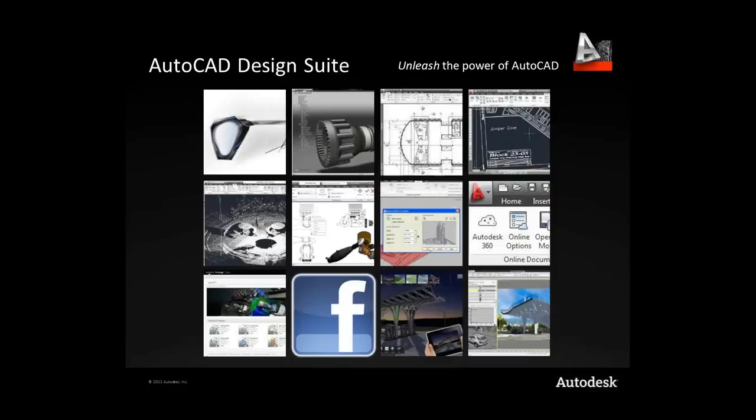And you may be asking yourself how it's able to do that. AutoCAD Design Suite enables you to do more with your AutoCAD software. Because the tools are within AutoCAD and leverage the power of AutoCAD, it enhances what you already know and takes everything up to the next level.

As I stated before, the AutoCAD Design Suite really is the best way for you to get AutoCAD, because it gives you the power of AutoCAD to capture, create, connect, and even showcase your designs.

There are three versions of the AutoCAD Design Suite: Standard, Premium, and Ultimate. Each edition is enhanced with products to help you increase your design capabilities, all based around the heart of the suite, and as it sounds, the heart is AutoCAD.

If you look at what you might want to leverage with the Standard Edition, the Standard Edition is the core product of the suite, and it's made up of AutoCAD, AutoCAD Raster Design, Sketchbook Designer, Showcase, and Mudbox.

The Premium Edition comes with all the tools I just mentioned in Standard, but also adds a level of design visualization, which enables you to add Autodesk 3ds Max design to the workflow. The Ultimate Edition adds everything Standard and Premium have, but also adds surfacing capabilities with Alias Design. But at the heart of the AutoCAD Design Suite is AutoCAD, and it enables you to take your AutoCAD up to the next level.

Without any further delay, I'd like to turn the floor over to Lynn. Lynn, can you get us up to speed today?

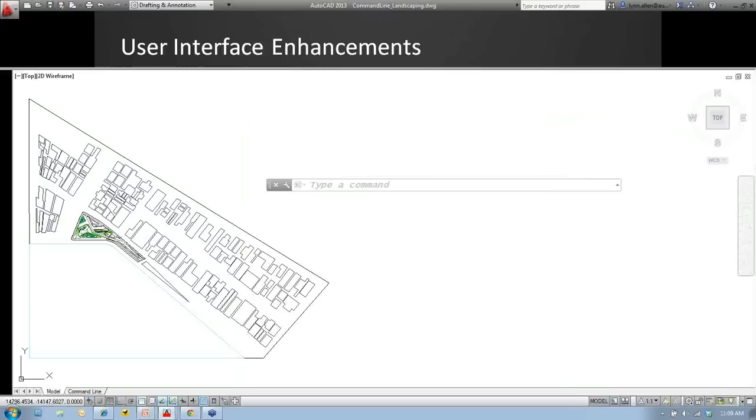Let's jump over and take a look at some of the changes to the user interface inside of AutoCAD 2013. I'm sure Christy will jump on the line if for some reason you can't do things correctly or if I'm going too fast. Right, Christy? You're good, okay, all right.

Here we are inside of AutoCAD 2013. One of the first things you'll notice after you log on is that the command line is a little different than it has been in the past. I am a command line user, and I'm sure you probably are too, so I don't like changes made to the command line—it makes me nervous, but you're going to really like these changes. I've been quite happy, so let me show you.

If you look at the command line, you can see it's in this semi-transparent state. Notice as I move my cursor over it, it shows up. So those of you who are greedy with your screen real estate—and you know who you are—think about this: you can take the command line, move it into a corner of the screen, and make it even more transparent than it already is, so it's completely out of your way, giving you a little more drawing room. Now I have it right in the middle of the screen. You're never going to do that, but I just want to make it easy for you to see how this new updated command line works.

So I'm going to just go into the polyline command. You can see I still key everything in, right? Don't be like me, be better than me.

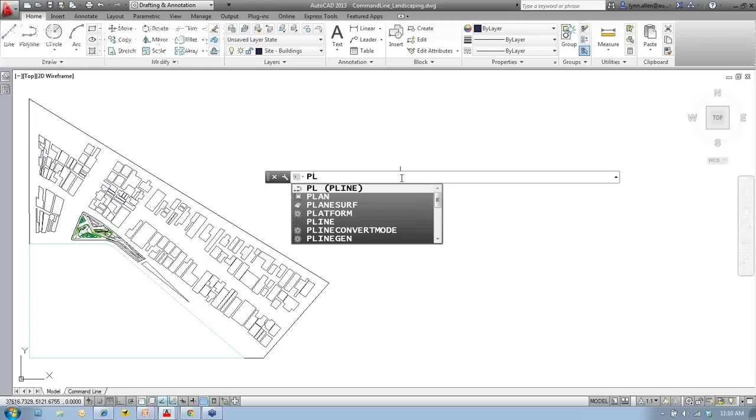And I'm going to do a polyline. I'm just going to start to draw, and you'll see the history shows up above the command line. I love this next new feature. Notice how the options in the polyline command are highlighted in blue. Look, I can actually grab them with my mouse from the command line. Love, love, love that. That means I don't have to pick up my hand and move my fingers.

So did you see the history? Did you see it kind of vanished away into the abyss? So when you're done with it, you don't need it anymore. It's kind enough to go away, which I love.

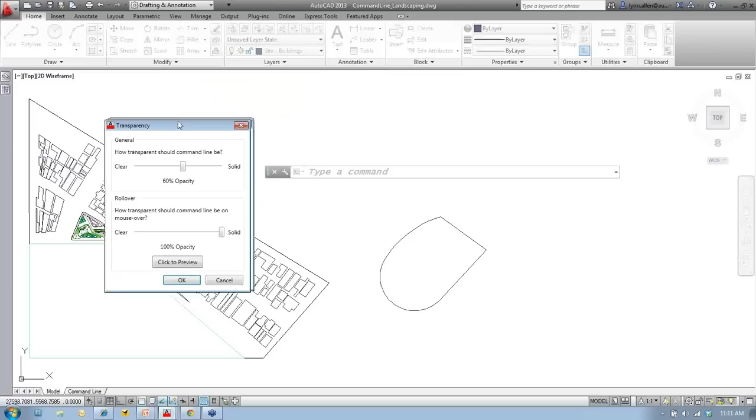As I mentioned, you can make it more transparent if you want to. Some of you are really greedy with your screen real estate, will want it to be almost invisible. You'll see as I move my cursor, look, you can barely see it. Make sure if you do that, you know where it is, right? Don't want to lose it. All right, I'll leave it.

It's not going to matter because I know that many of you believe that the good Lord intended the command line to still stay in the lower left-hand corner of the screen, so I want you to see that, of course, that is still an option. And because I'm a rebel, I'm going to keep it down in the lower left-hand corner. I kind of like it that way. But the good news is if I go into any command, look, I can still access the prompts by picking on them. Love, love, love that. Great new feature inside of AutoCAD 2013.

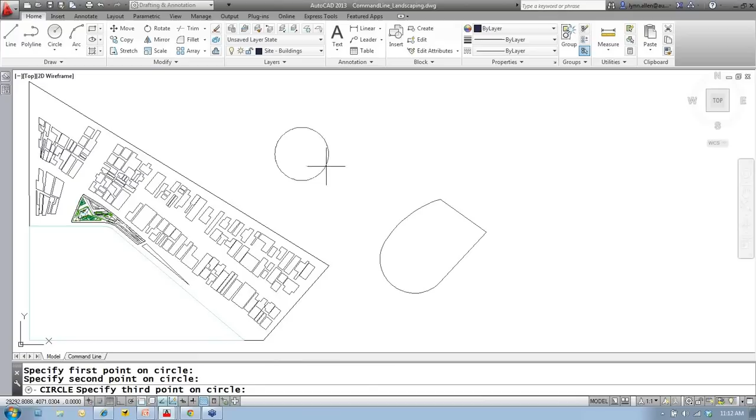And also you'll notice that when you log on to AutoCAD 2013 for the first time, you're going to get this friendly little welcome screen. This welcome screen makes it easy, of course, to start new drawings and open existing ones. I like this recent files list on the left. I actually think this is easier to get to than from inside the application menu. I think the application menu is a little jumpy and hard to get to the right drawing. So I like to use this list. I use it actually quite a bit.

There's some videos on what's new inside of AutoCAD 2013, some general videos on AutoCAD. And then in the upper right-hand corner, we have access to the Autodesk Exchange App Store. We're going to take a look at that in just a second. And the fabulous world of Autodesk 360. We'll talk about that later on. And for those of you who don't get in trouble for going to Facebook or Twitter when you're working, you'll see that you have direct access to the AutoCAD Facebook and AutoCAD Twitter page.

Now, some of you are not going to like this menu screen to pop up every time you launch AutoCAD. You can turn it off if you want to. That's completely up to you. I kind of like it. I like the welcome screen.

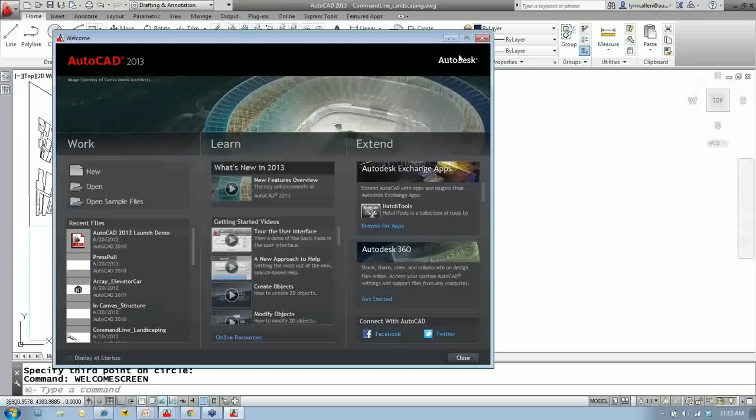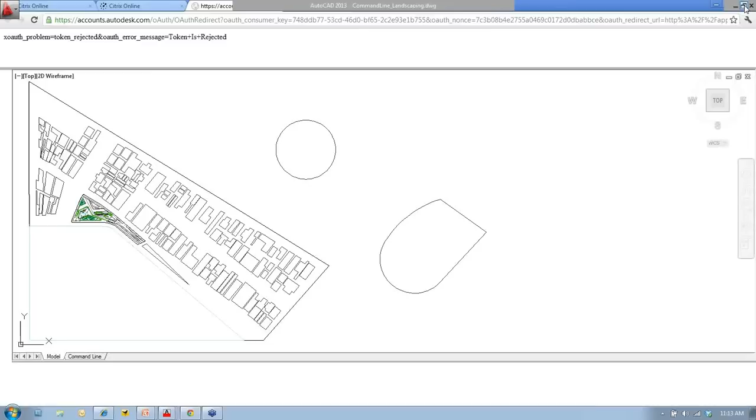So let's see what else. So whether you are in AutoCAD 2012 or 2013, in the upper right-hand corner, you'll see that there's this great big X for the Autodesk Exchange App Store. I'm going to go ahead and grab that. Okay, I'm not going to grab that. It doesn't like me today. I just had this problem a second ago. All right, sorry about that. Oh, I don't get to show that to you.

So I will tell you, though, that that goes to the Autodesk Exchange, and you'll find all these great apps that you can download and bring into AutoCAD to customize your experience with AutoCAD. I'm actually going to go to Featured Apps, and let's see, that's working. So I'm not sure why it won't let me out. I think it's actually a problem with my browser, and it's not a problem with the Autodesk Exchange.

So if you take a look at the screen, you'll see that I have some featured apps that pop up automatically. That kind of keeps me in line with what's new and trending, and you'll actually find that a lot of the apps at Autodesk Exchange are free, and we all love free, right? They don't cost you anything, but they're a nice way to customize your AutoCAD experience. And I'm sure some of you out there use SketchUp. Probably the most popular of all the tools is this great app that you can load on that lets you bring SketchUp models directly into AutoCAD very easily.

So definitely take a look at the Autodesk Exchange App Store, and I apologize that it's not playing nicely for me today. A couple of releases ago, Quick View Drawing came out. I'm not going to lie, I wasn't a big fan, but I'm totally a convert now.

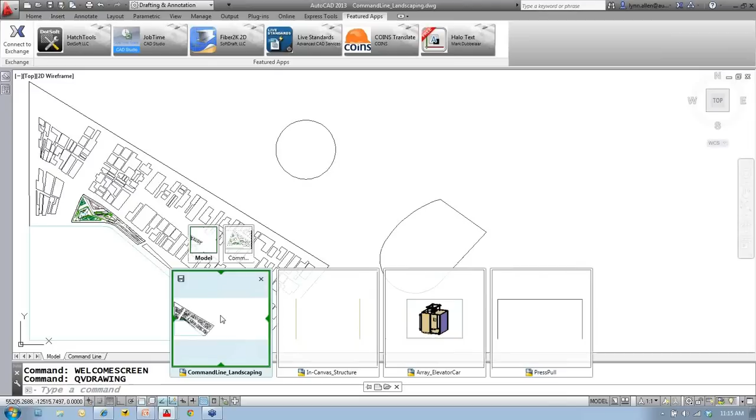Inside of AutoCAD 2013, it's been updated so that you can clearly tell what the current drawing is, because that wasn't clear at all before. You'll also see this is a great way to get to other open drawings and layouts in the other drawings. In fact, you can do a plot, or you can do a publish of another drawing, another layout, without even having to go to that layout, which I think is pretty powerful.

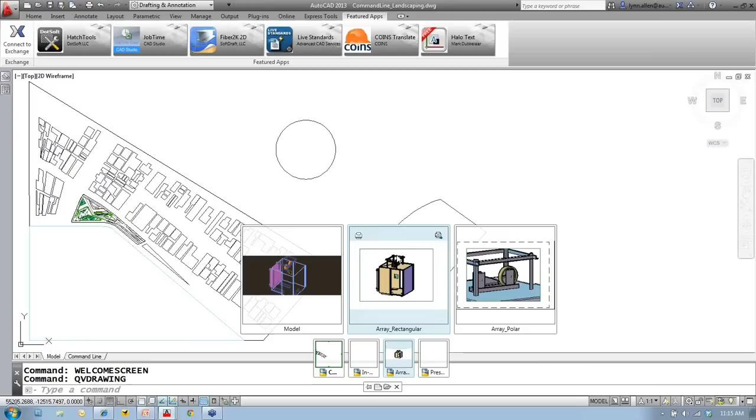So I'm going to use it. I'll be using it a lot during my presentation. I want to go over here to this particular drawing. Easy enough. Let's go back to the Home tab on the ribbon.

I'm going to go ahead and grab this surface. It happens to be a 3D surface, but it could be any 2D object. And as you know, of course, it tells you right away the colors and the layers of that object.

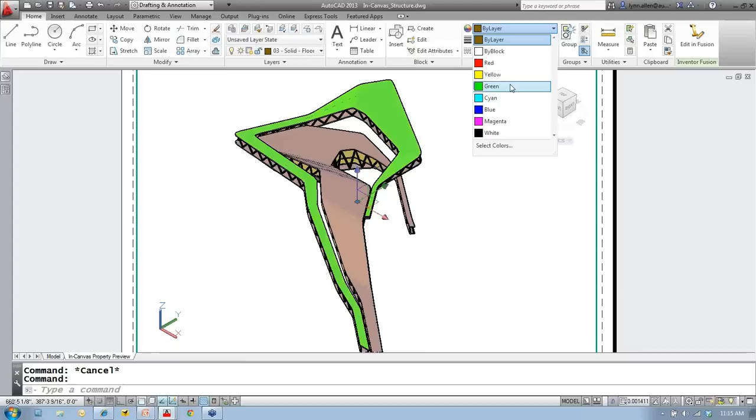I just want you to notice as I move my cursor down the list that it's showing me the changes in the properties as I go down this list, what it would look like. A nice, beautiful property preview. So you don't have to pick it to see what it's going to look like, it's always going to give you a preview. And this works for any of the properties, transparencies, line types, you name it.

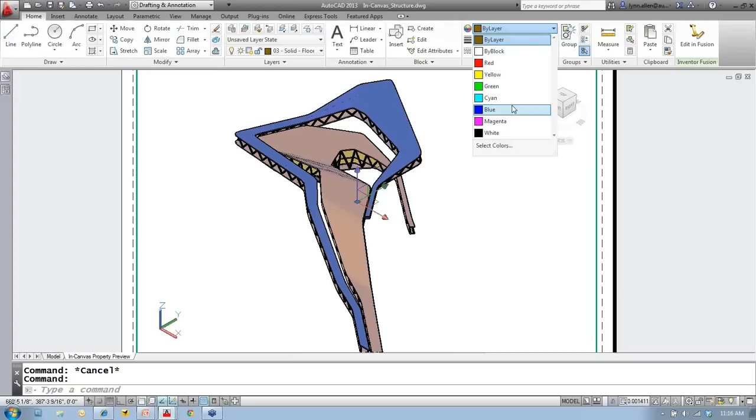Really nice new feature inside of AutoCAD 2013. So other than that, not a lot of changes to the UI, which I actually think is kind of a good thing. You don't want too many changes in one release. Just a couple of really good changes, which makes me happy. I hope it makes you happy too.

Now, let's jump back over to our PowerPoint.

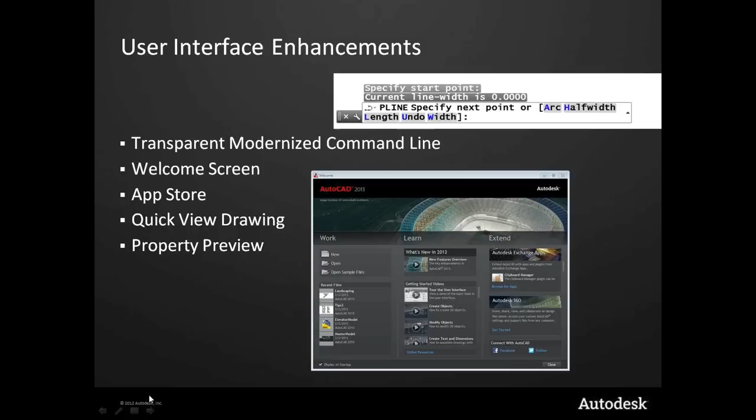So with AutoCAD 2012, the associative array was introduced, and I hope that those of you who are on 2012 or higher have had a chance to try it. With AutoCAD 2013, we really made these associative arrays even better, easier to work with, more visual, super, super friendly. For those of you who don't know what an associative array is, what the heck I'm talking about...

The arrays from AutoCAD 2012 forward are really smart, so that when you finish with the array, whether it's rectangular or polar, or there's a new one called path, you can make edits to the array after the fact. It used to be once an array was done, hey, it was done. Good luck making changes to it.

Usually you'd have to erase the array and start all over, but these new arrays are really smart, so you can change the distance between the rows or the columns, or change the number of rows, etc. after the fact. So I'm going to show that to you inside of AutoCAD 2013, show you what's new. I really, really do like the new associative arrays.

All right, so I'm going to jump over to a different drawing. Hopefully you guys are still following along. Let's go over here. That looks good.

So this happens to also be 3D, but don't stress, don't worry about it. If you're not using 3D yet, it works exactly the same in 2D. So I'm going to come up here, and we're going to do a rectangular array, right? Am I inside the viewport? Yep, I am inside the viewport. That's always a good thing, you love it when you go to a viewport and you're not inside it when you try to select objects.

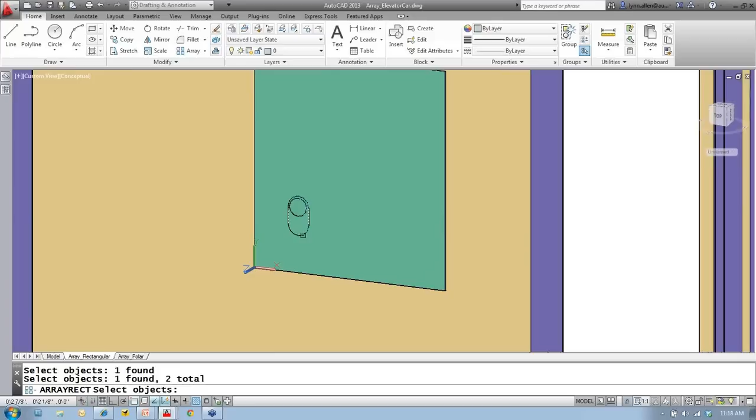So I've highlighted 2 objects that I want to array. I'm going to hit enter. Oh, I missed that second object. Hold on. So you can tell this is live, right? You saw me pick the second object, it looks like it's highlighted. There we go, for some reason it didn't want to pick that second object.

So you'll see that it immediately gives me a 4x3 array. Now, you probably don't want a 4x3 array, but this is a nice way of seeing what you've got so far, so that you can figure out the changes that you need to make, so you can tell if you're on the right track. So right now it's a 4x3, but I want you to see these grips. Here's a grip at the end of all the columns. If you want to add some more columns, it's really easy to do that.

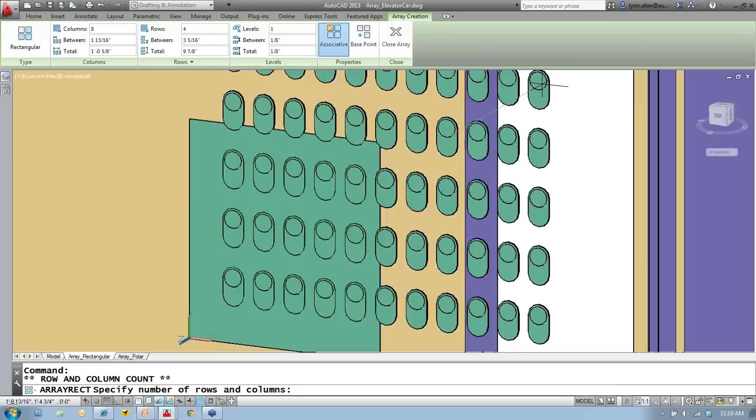You'll see that there's a grip at the end of the rows, so you can add more rows. Pretty friendly, pretty easy. You'll also see there's a grip at the end of the rows and the columns, so you can kill two birds with one stone and decide how many rows or columns you want. It's so visual and so friendly.

So remember, this was the source object. There are grips on the objects next to the source object that let you control the spacing between the columns or the spacing between the rows. Very visual, very friendly.

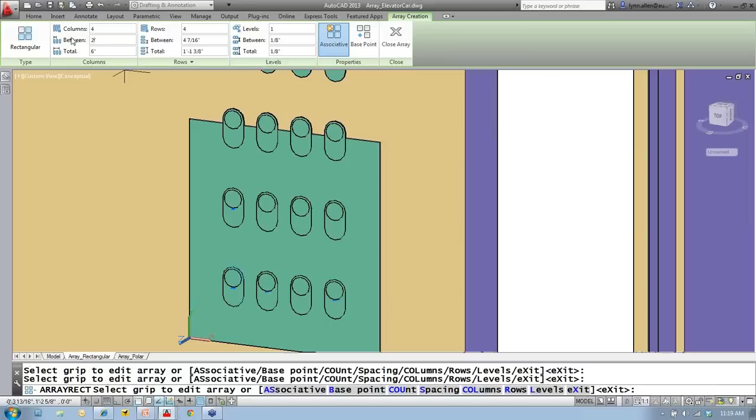Now that doesn't mean you can't still use the ribbon and make changes. Maybe I only want 4 columns, maybe I want them 2 units apart. You can still do it manually on the ribbon, absolutely. But just know you don't have to anymore, because these grips are so friendly.

I want you to know you can still hold down the control key and edit these objects individually. See, I just deleted that object. There's nothing to keep you from doing that. So it's kind of the best of both worlds. These arrays are like one big object that's easily modified, but you can still edit the individual parts of the array just by using the magical control key. Very, very cool.

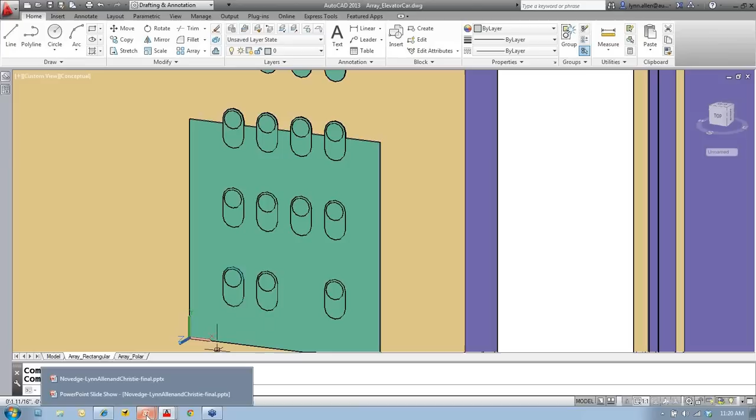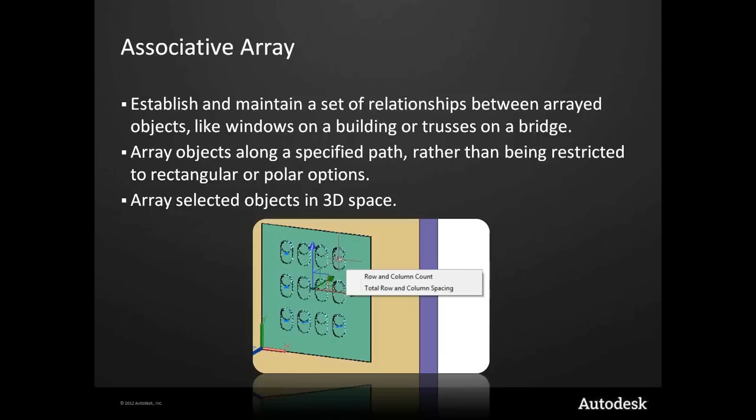I don't have a lot of time, so I'm not going to show you the polar array, but it's the same concept, nice and visual. By default it gives you 6 objects, but of course you can change that to suit your needs. For those not familiar with the path array, it's a great new addition that allows you to array objects along a path curve, like a spline. That's been on the wish list for many years.

So once again, I'd ask you to raise your hands to see how many of you are using 3D. I'll assume about half of you are probably using 3D. There are some nice new improvements inside the land of 3D in AutoCAD with commands we're pretty familiar with.

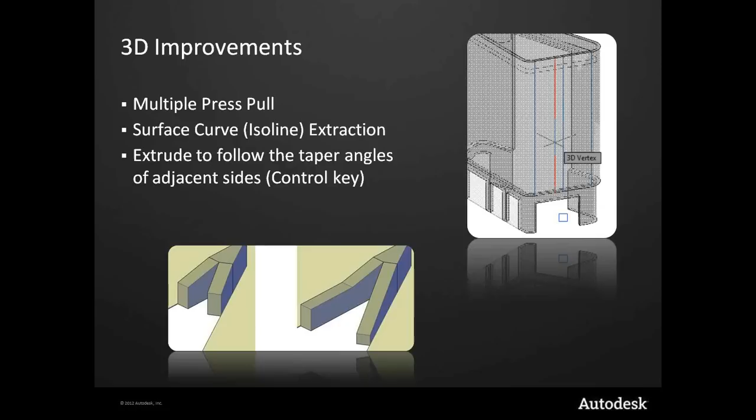If you use AutoCAD 3D, I'm sure you're familiar with the press pull command, and there's a really nice new command that allows you to extract isolines from surfaces. Super easy to use, so let me show them to you.

Jump right back over, if you guys are still hanging in there. I'm going to go back to the fabulous quick view drawings. Like I said, I'm totally a convert now, which is kind of nice. Let's come over here to this guy right here.

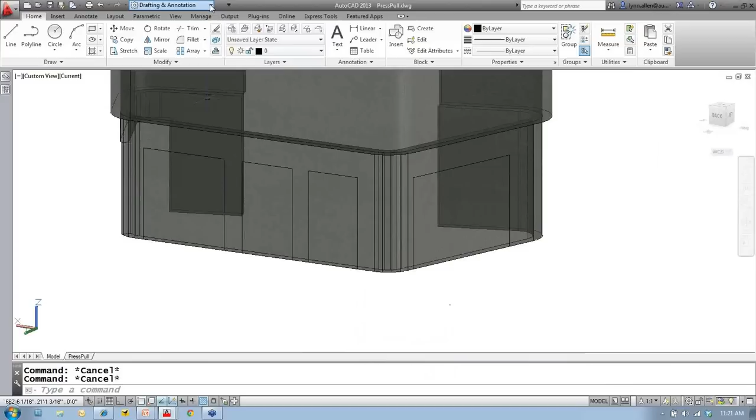I'm going to switch over to a different workspace. Hopefully you are using your workspaces. I'll switch over to the one that comes with AutoCAD 3D modeling, which gives me all those great 3D tools. I'm going to select solid, and there I'll find the press pull command.

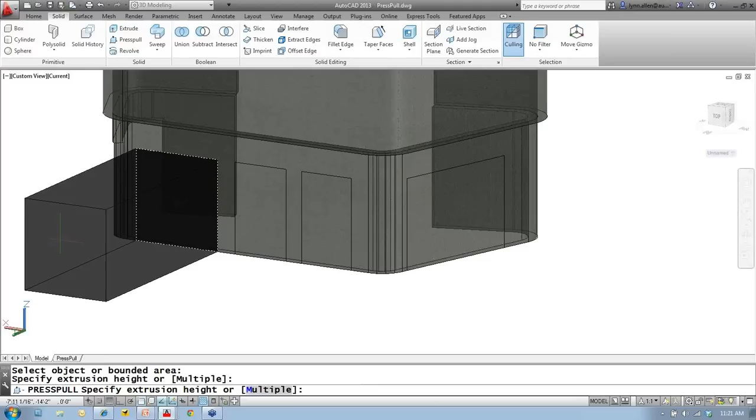Let's make sure I'm in the viewport again, right, we've all learned that. Press pull. I'm going to select this object right here, and you can see how press pull works—you can add or remove material.

In the past you could only do press pull on one object at a time, but there's a multiple option, which I'll grab from the command line because I love that new feature, which allows me to select multiple areas to use press pull on. Really, really nice. When I hit enter, you can see now I can extrude all of these if I want to.

I'm going to turn off my O-snaps for just a quick second, see if I can get this right today. There we go, perfect. You'll see it punched a hole through that particular object, all those different holes. So that was pretty easy with press pull, a very popular 3D command. I'm going to switch over to a different view.

I always love to use views. It makes it easy for me to get from A to B. Hopefully you're using views as well.

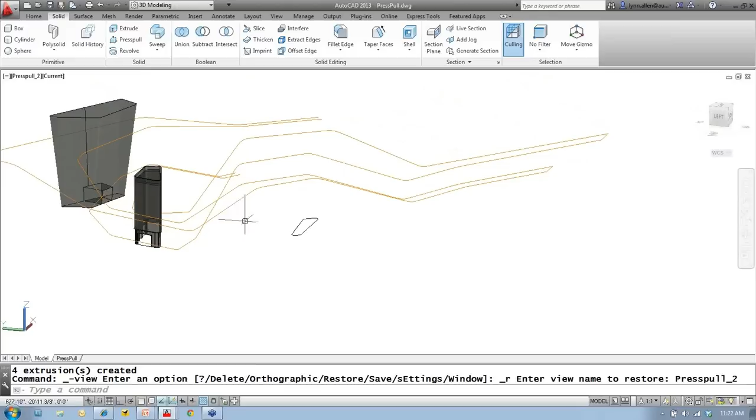Now it used to be that press pull only allowed you to work on objects like this. We had a closed boundary and you would pick inside the boundary. Press pull is just so much easier going now. Press pull allows you to also work with open objects. This is a 3D polyline. It never let me do that before.

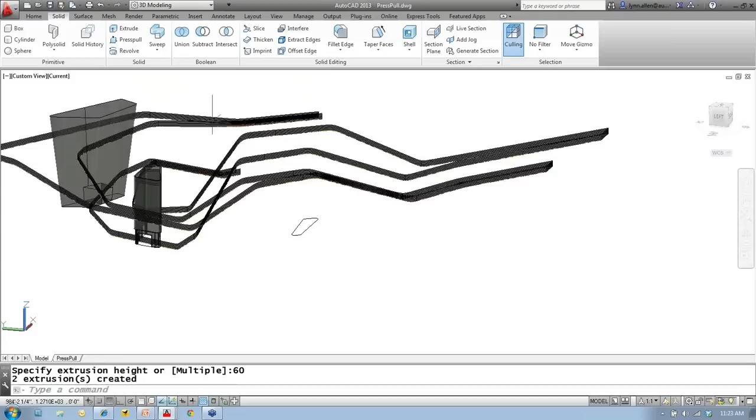Let's do multiple, and let's grab the other one as well, so you can see both of those great new features in action. I'm actually going to give it a value of about, I think 60 should do it. So you can see I was able to extrude both of those 3D polylines, which I never could have done before. And last but not least, my favorite part of press pull.

So I'm going to come in here, do a press pull on this surface right here. Give it just a second and pull it out. Okay, so that kind of works the way I thought it would work, no big surprise.

Now watch what happens. You can't see me, but I'm holding down my control key. Now watch what happens when I go to extrude that. Can you see that it's tapering? So if you have the control key down, it will take a look at the angle of the original object and it will continue that angle when you use press pull on it. Love that. That's fantastic. Super easy to do as well.

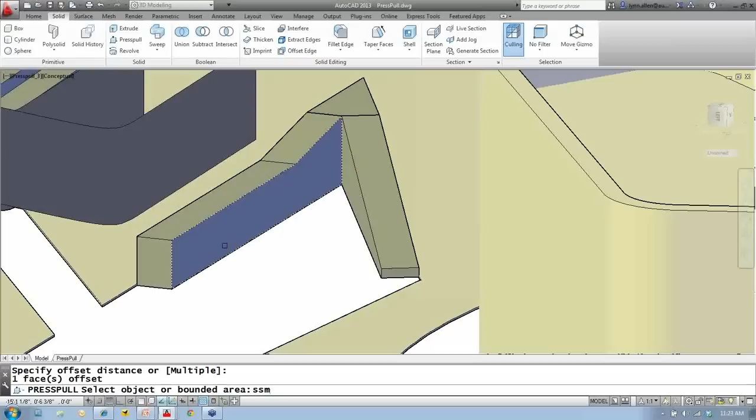All right, I'm going to actually go into the Sheet Set Manager and open up another drawing to show you the last feature of 3D. I'm not sure how many of you out there do surface modeling. Surface modeling is probably the toughest thing to do in any application, so if you're a surface modeler, you should pat yourself on the back because that means you're probably pretty brilliant. These objects all have surfaces, of course, and I'm going to show you this great new feature that you don't have to be an expert to use called Extract Isolines.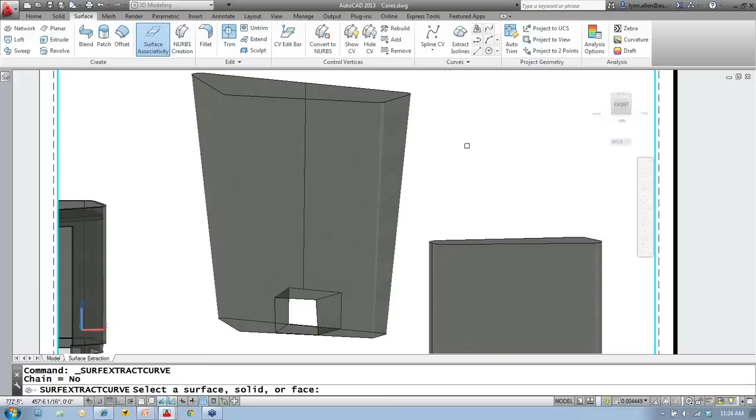Super easy, just select any surface, and can you see the isolines showing up? And I can pick which ones I want it to actually keep. Let's grab one over here, and see I can work off of those isolines, right? I can work off of those objects. Let's change the direction. Really friendly, move on the other way. And it even allows you to draw a spline on the surface, a nice free-form spline, which, you know, that's pretty tricky. Normally that would be pretty hard to do, but super easy with this new Extract Isoline tools up there. So a really nice new feature.

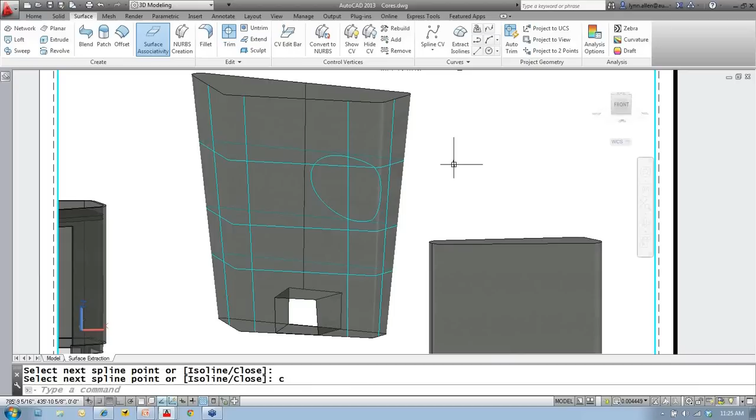I like that feature too. See, doesn't that make 3D look so easy? All those little options there, those commands. If you haven't had a chance to try 3D in AutoCAD, definitely give it a try, all right? Because I see more and more people making the move over to 3D, and it's just so powerful.

So also, model documentation tools also has to do with 3D. One of the things that I kind of thought was missing in the past was the ability to easily create the drawing views, the documentation from 3D models. It was kind of tricky, kind of hard to do. It seemed like there was an easier way of doing things, but we just didn't have it inside of AutoCAD. And you know what I'm talking about, right? We can create 3D models, but hey, we still get paid to turn in those 2D drawings.

We still need to document them with a top view and a side view and an isometric and add the dimensions and the details and all of that. So I thought that was pretty tricky to do before AutoCAD 2012. But the last couple of releases of AutoCAD have really made it so much easier to do. So I love these. These are, to be honest, my favorite features inside of the last couple of releases of AutoCAD. I just think these are just fabulous tools. So let's take a look.

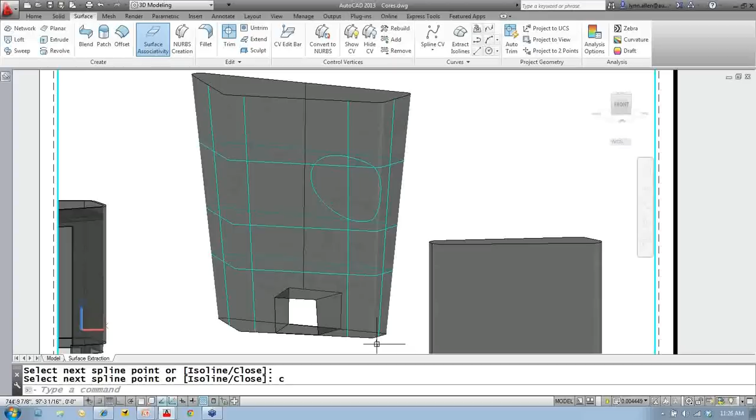All right, so let's see if I can find my dental chair on the welcome screen here. Let's see if I can find it. Let's see, move my cursor. I've been doing so many different drawings and commands. There it is. Perfect. I think that's easier than the application menu, to be honest. I would probably put that on a button just so I could get to those drawings so quickly.

So first thing I want you to know is that I picked an object that I thought you guys could all relate to. I like to think we can all relate to a dental chair. Please tell me that that's true. And I got this dental chair. I'm afraid to go try to access my internet.

I'll cross my fingers again. But I'm going to go to the Insert tab, and you'll see here Autodesk Seek.

This is the land of free content. We all love free, right? Here you'll find all different types of blocks, product models and specs, all kinds of good stuff.

I'm going to say I want to find a chair and cross my fingers that it doesn't yell at me again. See, look at that. Now it's happy, all right good.

So here we are at Autodesk Seek. You don't have to have AutoCAD 2013 to get to Autodesk Seek, but it sure makes it easy if you do. You'll see all different types of chairs here. It says I have 166 chairs, 2D chairs, 3D chairs. You'll find AutoCAD chairs, DWFs and PDFs, and all different types of objects.

And this isn't just for the AEC industry. You'll find other types of objects as well. Look at all that, that's an unusual chair, isn't it? It's pretty funny. All right, let me go back over to AutoCAD.

So I finished my model. Obviously, I can't say here's my chair, go build it. I have to document it, right? I have to make those 2D drawing views.

No problem, I'm going to go to the Layout tab. It's completely empty, nothing up my sleeve, right? And the magic happens on this new tab in the ribbon called Layout. The Layout tab is brand new, it has all kinds of great features in it. This is the part I'm going to deal with right here, that Create View.

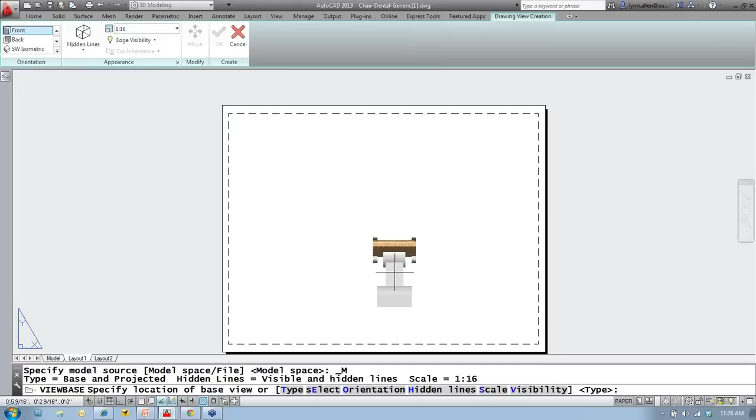I'm going to make a base view from Model Space, and that's going to go get my chair. Now, it used to be that you had to bring in the whole chair or nothing, all or nothing, but now there's a select option that allows you to bring in as much of the model as you want, which is a nice addition to 2013.

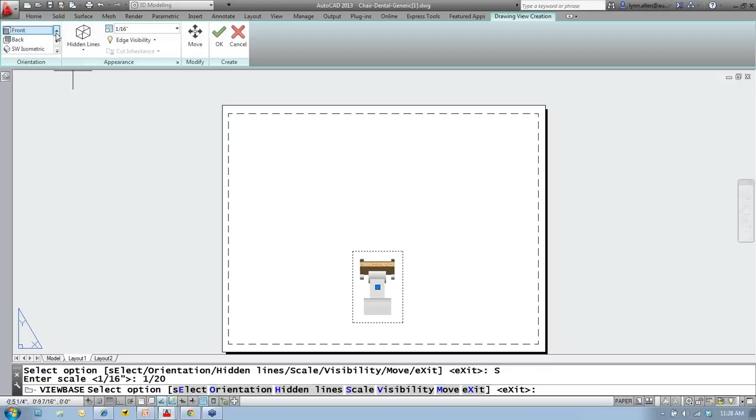All right, let me drop that guy into place. You know, I'm not too keen on that scale factor, I'm going to make those a little bit smaller there, 1 to 20. And when I'm happy with the size and the direction, the orientation, you'll see in the upper left-hand corner it's by default displaying the front, but you can change that to a bunch of other options. If you're happy with it, you hit an extra enter, and this is where the magic begins.

Look at this, just wherever I place my view, just by the way I move my cursor. Super, super easy. I could add more if I wanted to, but it just depends on the direction that you move it.

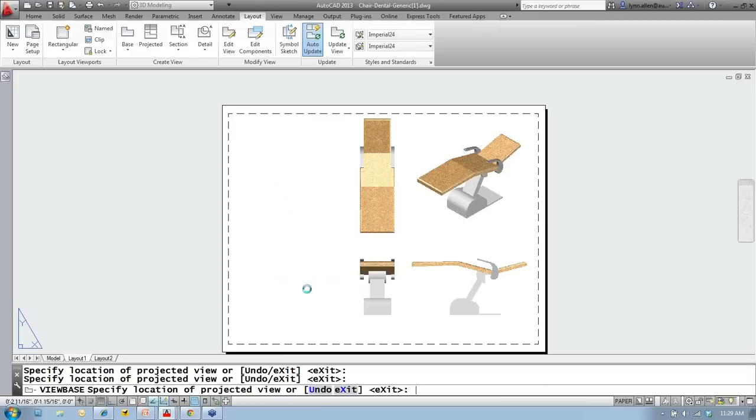Very powerful. I'm going to go ahead and hit enter, and you'll see that it will convert those objects to wireframe, those views to wireframe, which is probably what you want. You can totally customize that to do what you want it to do.

Now, these are so smart. Look at these, they know they need to stay lined up. Don't you just love that? How many times have you had to realign your viewports? Ugh, this is so nice.

I can also easily change the scale factor. It was 1 to 20, maybe I want it 1 to 30, maybe I want to make them even smaller.

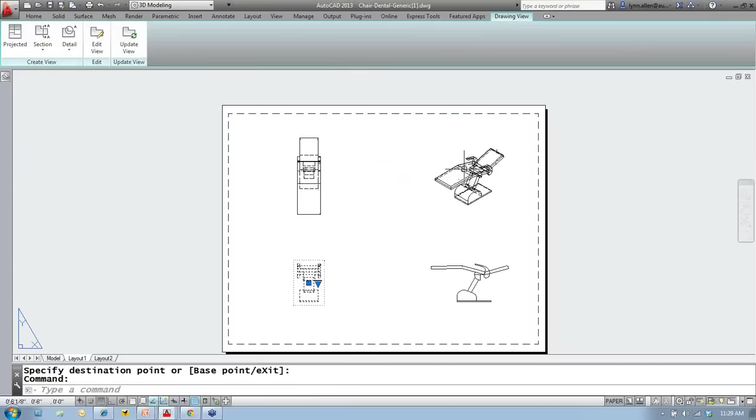Now you'll notice this guy's the parent, and these children follow. These are the children views, this is the parent view. And whatever you do to the parent is going to affect the children.

But that doesn't mean that you can't change the individual views. I can come up here and say, you know what, I really wish that one was 1 to 20, make it a little bit bigger. And I could edit that view individually too.

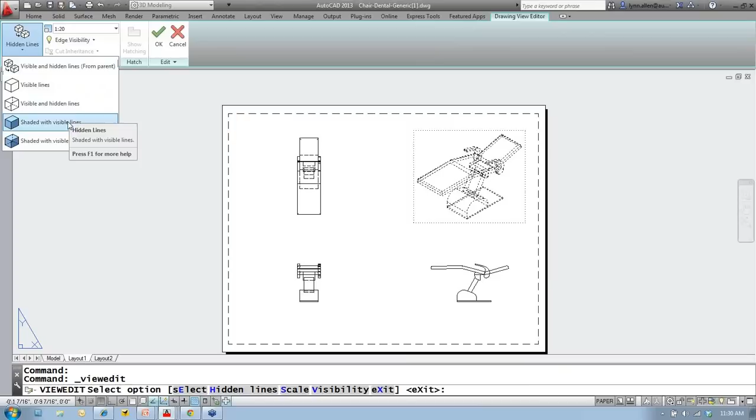Maybe I want to change it so that, can you see this right here? It says visible and hidden lines from parent. Can you see that? We're going to override that. Let's make it shaded, there we go. That's kind of cool. So that's just kind of showing you how easy it is to place these very smart views inside of AutoCAD 2013, and they're linked to the model.

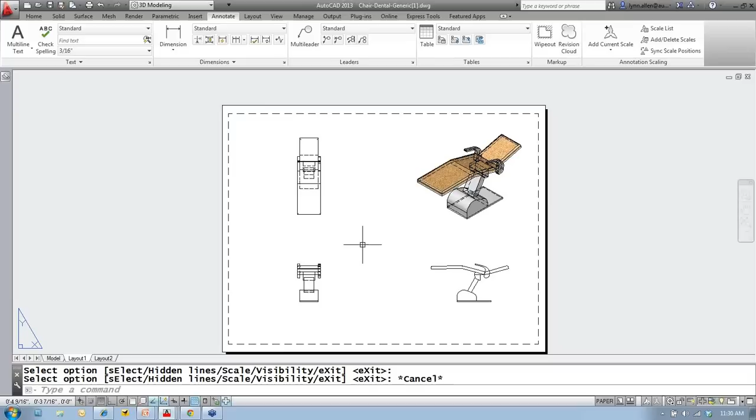All right, before I go too much further, I'm going to very quickly add in a few dimensions because we're going to change the model. Not that your designs ever change, but just in case they do, you want to see what happens when you come back over to the drawing views. All right, I'm going to zoom in really fast.

Let's add some dimensions in here, zoom up on that, pull that out. I apologize if you're joining us from a foreign country and not used to imperial units. This chair was done in feet and inches, and that's why it's showing up that way. All right, so we have some basic dimensions.

Let's go back over to our model. All right, no problem, zoom in. I'm going to make a huge change, all right? It's going to be a great big huge change. Just going to pull this out. That's a pretty big change. If I zoom out, you'll see it looks a little bit different. That chair will never fall over now, right?

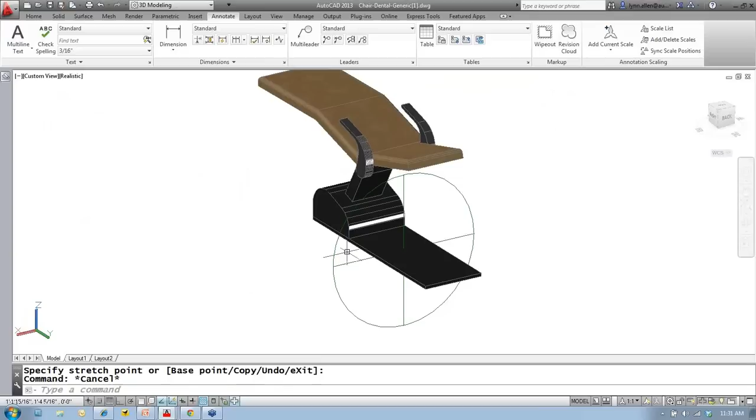And I'm going to go ahead and erase the back of the chair. Also a big change. Now I have arms floating in space. Super big change. Of course, you wouldn't really do that, but I think this is going to illustrate my point.

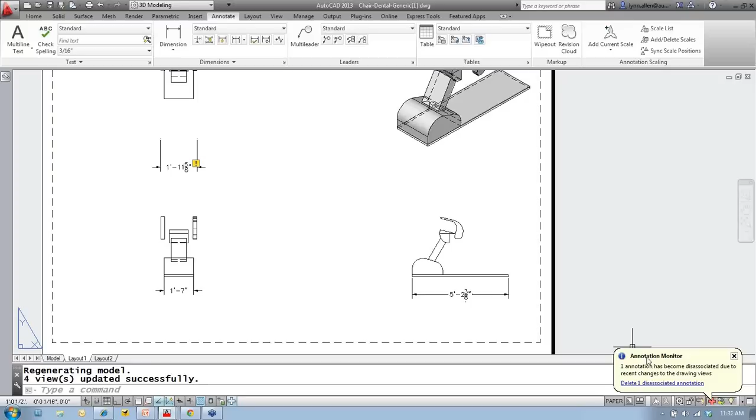Let me go back over to the Layout tab, and look at that - it updated each of the views. Yay, it updated the dimensions. Didn't do that in 2012. You'll also see that it realizes there's a dimension here that shouldn't be here anymore because it's no longer associated. Lower right-hand corner is the annotation monitor. All I have to do is say delete one disassociated annotation, and it will fix everything up for me.

So I just love that. This is so smart and so easy to work with. Love it, love it, love it. So definitely give this a try inside of AutoCAD 2013. Okay, back over to the PowerPoint.

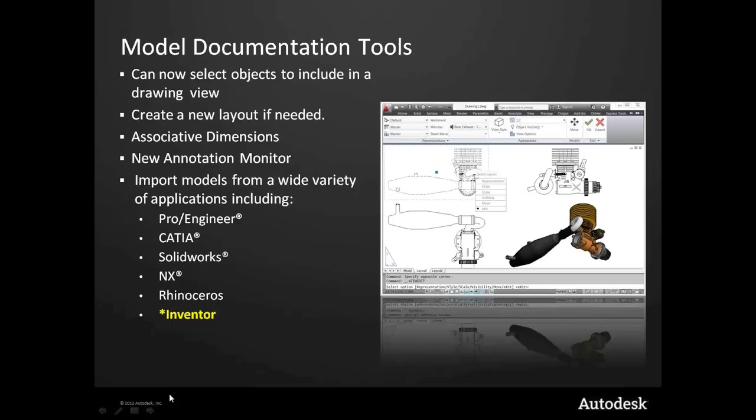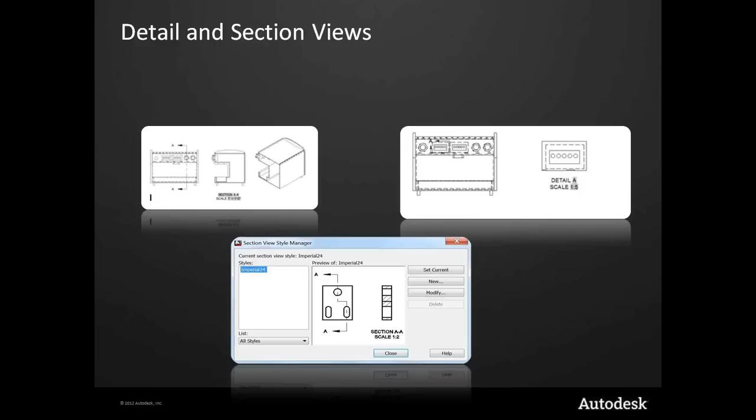So also a big wish list request, especially for me, was the ability to easily create detail and section views. Now, I'm sure almost all of you have made a detail view or a section view from scratch, and tell me that's not one of the most boring things in the world to do. It's super tedious, right? Got to put the hatching in, it's just so tedious. You're going to love this because it's going to be a piece of cake. It's only going to take you a couple of minutes. It's going to make it all pretty for you, and there's lots of options so you could adhere it to your standards, which is really important.

So let's jump over, it looks like I have time. I wasn't sure if I would - like I'm going to have enough time getting there. We'll do some detail views and some section views really quickly. All right, let me go back over to my other sheet set. And let's take a look at section views. If we have time, we'll also do a detail view, but you'll get the idea - they both are almost essentially the same thing.

So easy to do. It's thinking there, give it a second to think. The dreaded blue wheel of death. Dun, dun, dun, dun. This is when I need to have a joke or something. Okay, this guy walks into a bar... look at that, see? It was so afraid I was going to tell you a joke that it's shaped up, as it knows I'm not very good at telling jokes.

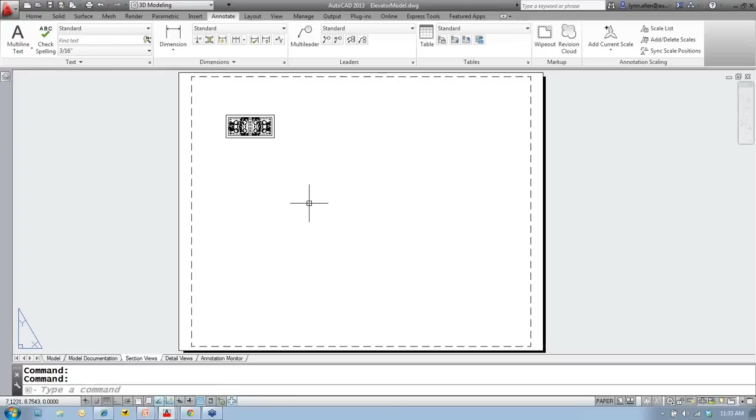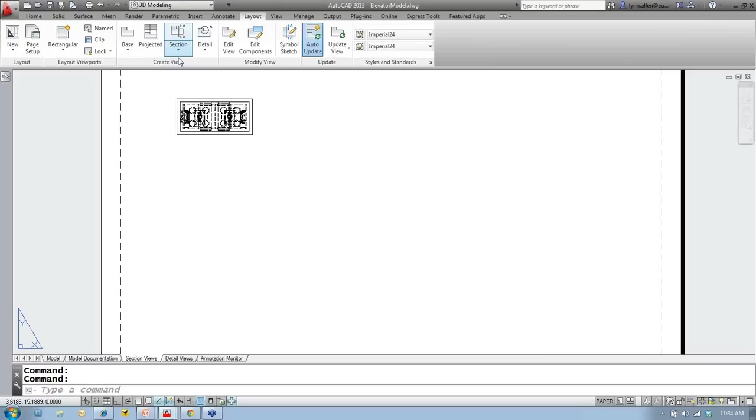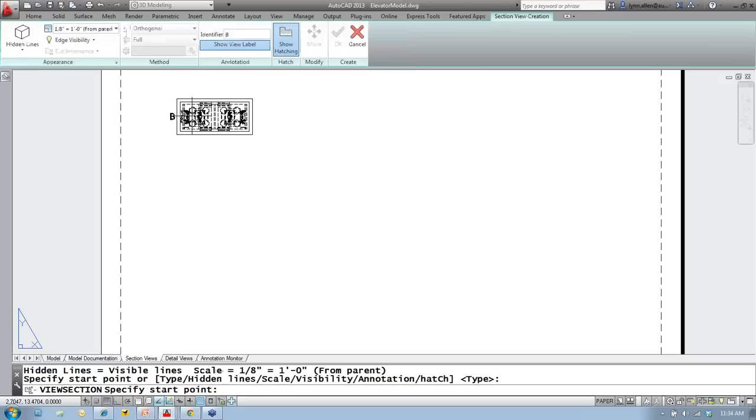All right, so once again, we're going to go to the new magical - I'll zoom in on this so you can see a little bit better - Layout tab that has all the awesome tools. And here you'll see section views and detail views, right? So I'm going to do a section view off of this view right here. You'll see there are quite a few options of how I do the section view, what kind of section view it is. I'm going to do a full section view, select the view that I want it to work off of, and then you just have to draw the section line. I'll turn my ortho on so it's nice and straight. How easy is that, right?

Now it's thinking about it, and I'm going to go ahead and place that. If I like where it is and I like all the options, you'll see you have quite a few things you can change. In the interest of time, we're just going to say that's fabulous and hit enter. I'm going to zoom out a little bit. You can see that it put a nice label on it. This is all customizable. Lots of flexibility here, but that was pretty darn easy, don't you think?

I can come in here to this view, and you'll see that I can easily change the scale factor. It's 1/8 of an inch. Maybe I wish it was 1/16 of an inch, right? Easy to change the scale factor.

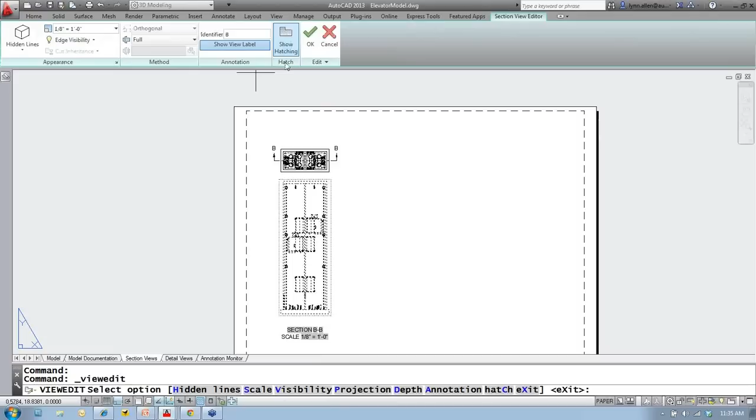I'm actually going to put it back. You'll also see that you can edit that view and make a variety of changes. You can change the identifier, and you can say, oh, maybe I don't want you to show the cross-hatching. Lots of options for you there.

So I also want to show you how easy it is to make changes just via the section line. I'm going to select the section line. I'm going to say, hey, I want you to go the other direction. Let's flip the direction. Now watch the section view, and you'll see that's exactly what it did.

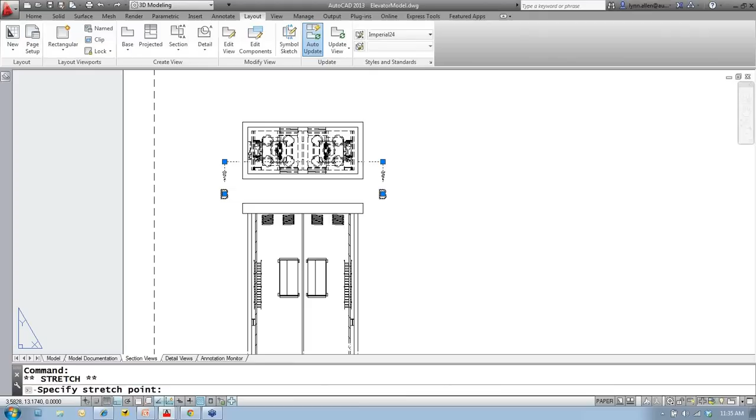You'll also see that you can easily move this section line anywhere you want it to go. It's just a window into the model. That's why it's so easy to make changes. It's just a different, you're just telling it you want a slightly different view.

You can also see that you can add a vertex or a segment. It doesn't have to be a straight line all the way across. A lot of functionality there.

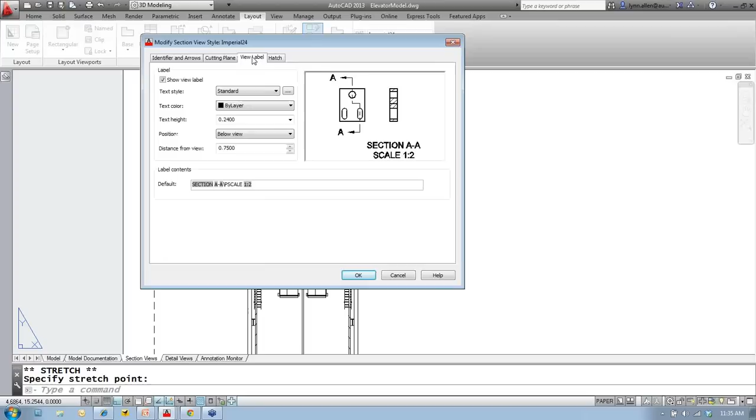Also, of course, very important, there is a new dialog box, the Section View Style Manager, that allows you to - we'll just hit modify here, so you can see all these different options - make sure that your section views adhere to your standards. All right, easy, easy, easy.

I don't think it gets much easier than that. So do you think I can do a detail view in like 1 minute? Let's see if we can get it done really quickly here. I want to make sure there's plenty of time for Q&A at the very end.

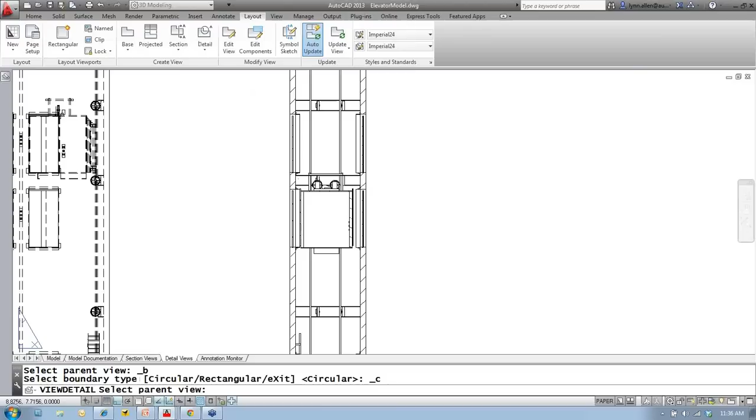All right, so I'm going to do a detail view off of this section view. How's that? They're so easy. Let's do detail. You'll see you pick between circular and rectangular. I'm going to say circular. Pick the view you want to work from, and then you just basically show it which part you want the detail of. You can see that right there.

Show it where you want the detail view to show up, and a final enter, and it will label it. All that's customizable. It looks like it's a little big to me. You could easily change the size of that, of the actual label.

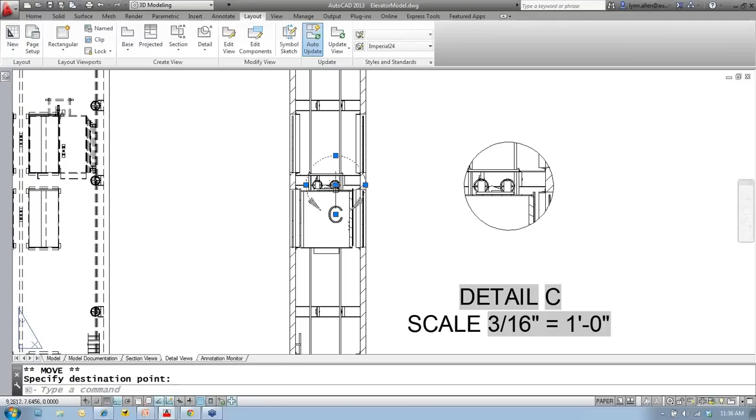All right, so let's see what else we can do. Once again, this is just a window into the model, so you can easily move it around and change the view. You can also come over here and you can say, I wish that the scale factor was a 1/4 inch equals a foot. Make it bigger, whatever makes you happy.

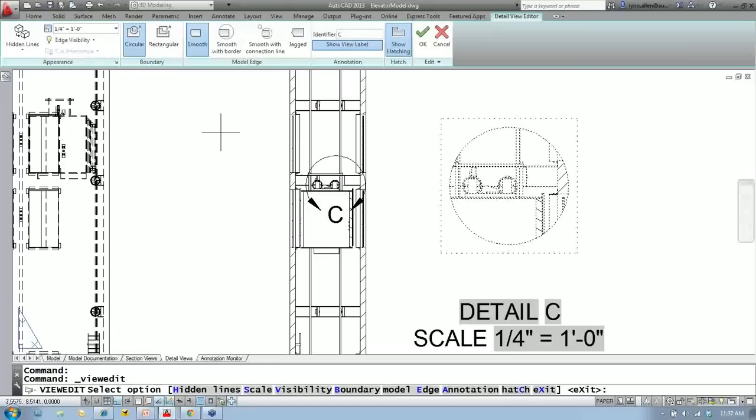Very easy to modify after the fact, along with this edit view option that once again allows you to make some different changes to the view that you already have. Maybe you wish that it were rectangular. Maybe you wish there was a connection line. Maybe you'd like to have it jagged. Lots of options available to you, along with, of course, the show hatching option, the identifier.

And if I go back out to the layout tab, you'll see that there is also - and it won't let me in until I get out of the command - there's also a detail view style manager dialog box, so you can set your detail views up to be exactly like your standards.

That was pretty good. I think that was literally a 2-minute detail view. It might be a record. All right, let's go back out to the PowerPoint.

You guys still awake out there? Hoping all of you guys are still awake out there. You're not doing your email, right? Maybe you're tweeting. You could tweet that you're having a good time at the seminar. That would be all right.

So last but not least, as far as AutoCAD is concerned, is that you have direct access to Autodesk 360. And Autodesk 360 is the Autodesk Cloud platform. It's fabulous. It's wonderful. This is a place that you can store all of your project files. You can store your AutoCAD drawing files.

You can store Word docs and Excel spreadsheets, anything that you need for your projects. You have up to 3 gigabytes of free space on the Autodesk 360 Cloud. Those of you who are on subscription will find that you have 25 gigabytes per seat.

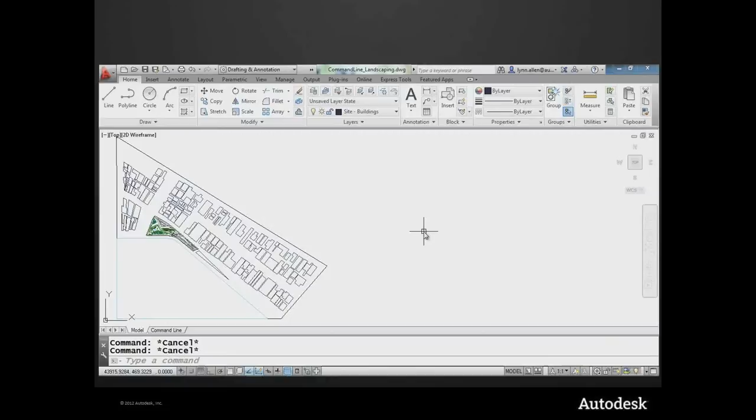All right, let's take a look. You will see that there's a new online tab inside of AutoCAD that gives you access to all the Autodesk 360 tools. You'll also see if you go into any command, like the open command that asks you to access a file, that you have access to Autodesk 360 from there as well, making it really easy for you to get to your Autodesk 360 files.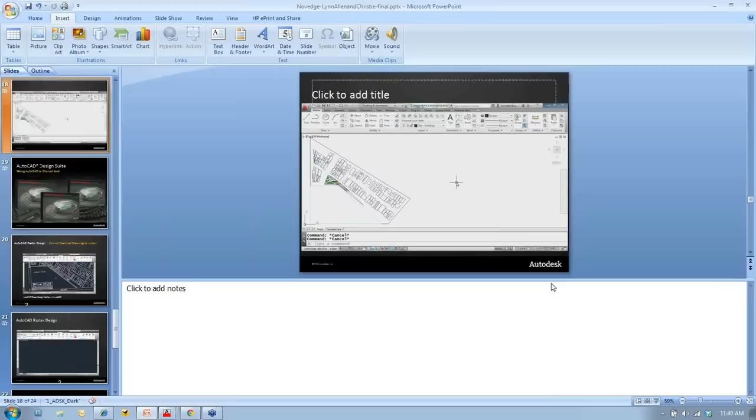Lynn, you'll also find that... I'm not seeing your screen. I'm seeing a little area. You don't see the video? As much as I can visualize, given the amount of detail that you provide, I'm having a little trouble. No, that's good. I mean, it's not good, I was kind of worried about the video showing up. Video's not showing up? It is not. All right, everybody cross your fingers, I'm going to try to do it live. All you out there have your fingers crossed, right? All right, toes, legs, all of it. Okay, you can see my screen now, right? Yes. All right, let's see. Thank you, I'm glad you interrupted me, Christie. We don't want everybody watching a big black screen of death.

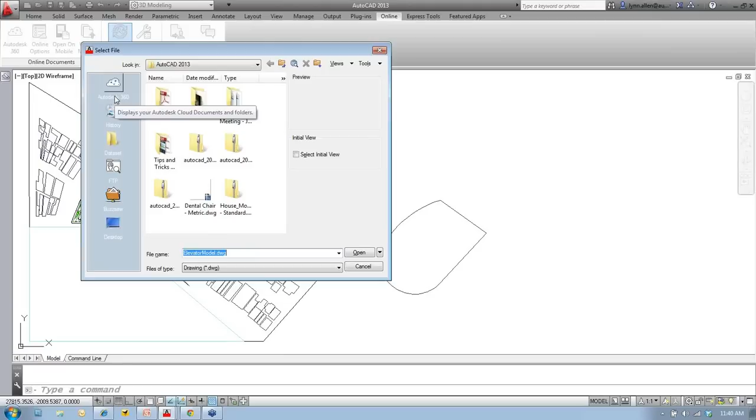All right, so here's the online tab. There's Autodesk 360 I was talking about, and once again, let me just show you. I'm going to go in the open command, and you'll see that there is an option for Autodesk 360. So if you have any files that you've placed up there, you have access to them very easily.

All right, let's see. I'm going to go to Autodesk 360. Look, it's calling me names again. It's me, I don't know why it won't let me play today. All right, the rest of you should have no problem. It apparently is just I have a black cloud over me today. So that's all right, because I have faith that the other thing I'm going to show you will work.

So the part that you're missing is the Autodesk 360. Basically, it shows you all the documents up there, and you can access those documents, share those documents, and even edit them by going into another software program called AutoCAD WS. It's another cloud program, you access it above the cloud. AutoCAD WS, free as well, because we all love free. That allows you to edit AutoCAD drawings online and share your AutoCAD drawings with other people, even if they don't have AutoCAD. You can share them and edit them at the same time.

It's collaboration at its finest, it's awesome, awesome, awesome. So even though for some reason I have my dark cloud over me, you guys should definitely go take a look at Autodesk 360 and AutoCAD WS.

All right, so let me show you hopefully something that is going to work properly. If it doesn't, well, I don't know, I guess it'll be time for early drinking after this presentation.

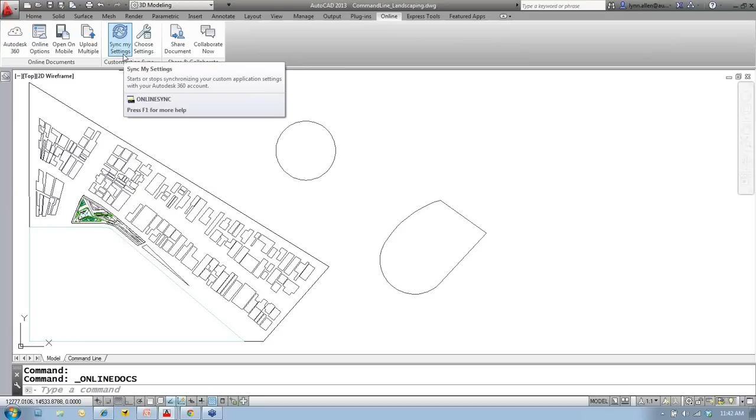That's this great sync my settings option. I joke that when I travel around, people tell me, oh, you don't need to bring your computer, you can just use ours, right? We have AutoCAD on our system, you can just demo using ours. And I just cringe and go, no way, there's no way I'm going to use someone else's computer. Do you feel the same way?

Haven't you customized AutoCAD to work exactly the way you want it to work? Because I certainly have. Here's how you can save those settings up into the cloud, into Autodesk 360.

These are all the settings that you can save: everything set in options, and that's a lot of settings. Your customization files, like your CUI files, you can save tool palettes including groups, template files, and a whole bunch of other settings into the cloud.

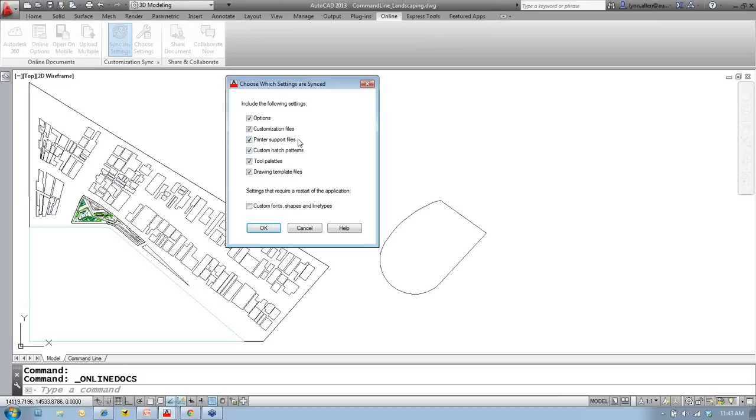All right, cross your fingers with me that this is going to work. I'm going to come in here, you'll see Sync My Settings is on. I'll right click, go into Options, and change the background color to something pretty horrible. For some reason I always pick green—I blame that on Heidi, she always picks green.

You would never work like that, right? But look, yay, upper right-hand corner—your settings are being synced with your Autodesk 360 account. That's working, that's good to know. I don't know why I can't get out there, but at least it's working inside of AutoCAD.

All right, so I'm going to turn off Sync My Settings—stop syncing my custom settings. So now it's no longer syncing with my Autodesk 360 account.

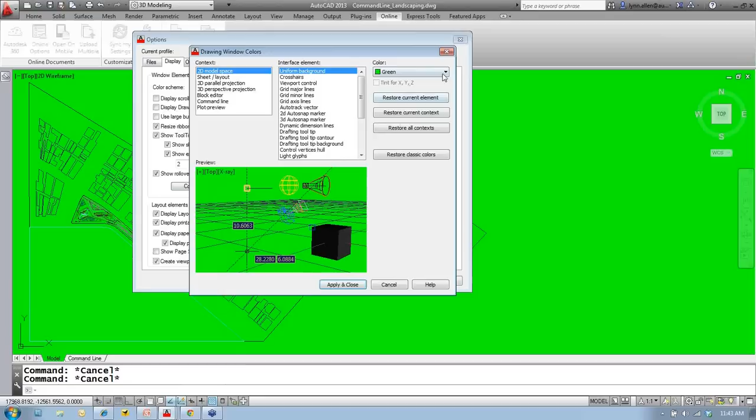Let's change the color again, to some other crazy color—a color I affectionately say none of us would know were not for AutoCAD: cyan, right? Who would know what that color was if we hadn't seen it in AutoCAD?

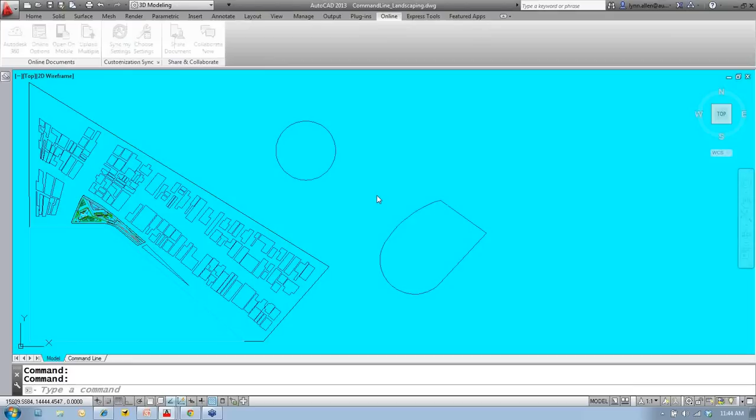So think about this: in the cloud is green, on my desktop is cyan. Now I'm going to come up here and say Sync My Settings, start syncing my settings, and say use my online settings. And look at that.

Yay, that worked perfectly—so, oh, that part didn't work perfectly. But if I go back inside of AutoCAD, if it lets me go back inside, let's go back over to our other drawing file.

And let's go back over here. Oh, you guys saw it—there it is. All right, I don't know why it keeps being mean to me today, because it's live. If this wasn't live, it wouldn't do that to me. It just seems to be the way of the world.

Well, I'm just actually pretty surprised that my dog hasn't started barking yet. Usually she barks in the middle of live webcasts as well.

All right, so I'm going to continue on here. I just have a couple of minutes left. So that kind of concludes the new features inside of AutoCAD 2013. There are more, I just didn't quite have time to show you anymore.

And so now I want to show you the newest addition to the AutoCAD Design Suite, and I love this: AutoCAD Raster Design. It's like a $2,000 product that they just threw into the AutoCAD Design Suite, which is wonderful.

I'm sure that many of you have hard copies of drawings laying around your office somewhere, right? Maybe they were drawn by hand, maybe drawn so long ago in CAD you don't have the files anymore, or maybe they're on a floppy disk and you're not too sure what to do with that. So AutoCAD Raster Design allows you to take scanned images and convert them over to vector—so much better than doing that from scratch, which I bet a lot of you have done over the years.

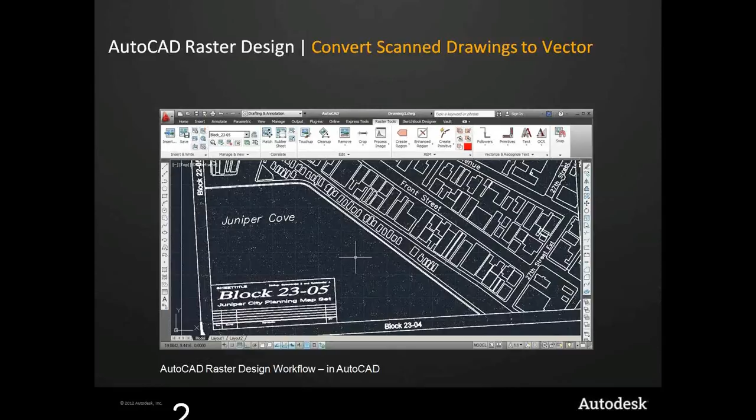All right, I'm going to cross my fingers if this video works. Let me know, Christy, if it doesn't work. I'm going to start talking and pretend that it does. That is working, it's moving. What's up with that? That's so funny. All right, wait, I'm going to make it start again because I was busy chatting. And now I know it works.

Yay, all right. So you bring your scanned images into AutoCAD Raster Design. You'll see Raster Design is just another tab really inside of AutoCAD, and it's really good at cleaning up dust and coffee stains. I've never seen a scan that ever came in at the right angle, so it's great at correcting that.

Now, of course, the key feature you want AutoCAD Raster Design to do is make it easy for you to convert that raster over to vector, right? So you'll see it's easy to convert these over to AutoCAD objects—look how easy that is, piece of cake.

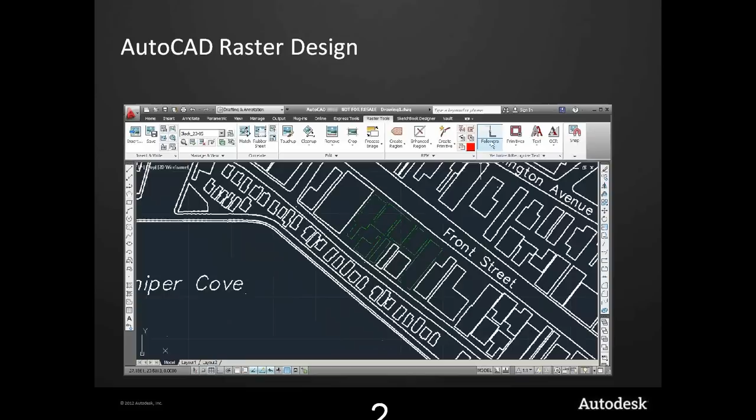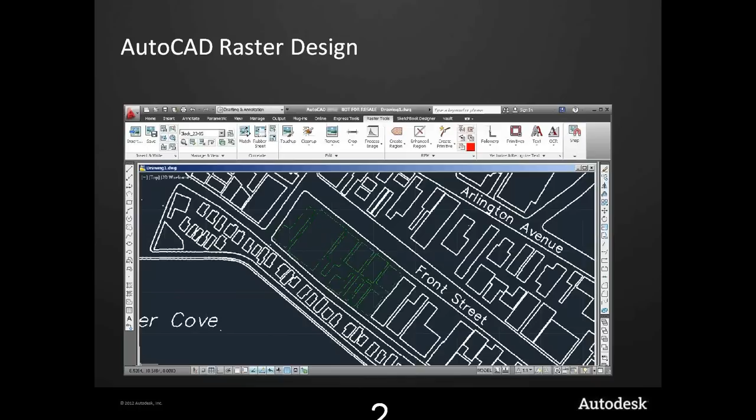It also recognizes text, so you can easily convert text over to the current text style inside of AutoCAD. You can clip it, and I love the fact that you can actually snap to the raster image. That's pretty crazy, that's amazing technology. So once again, the key behind this is to be able to convert it over to a vector file so that you can use it inside of AutoCAD, right? So you don't have to draw it from scratch. Really, really nice feature.

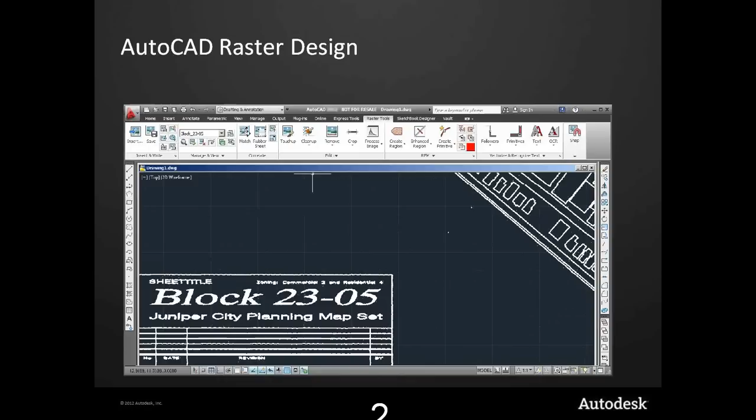So take a look at AutoCAD Raster Design. I just think it's a great product. And once again, that's part of the AutoCAD Design Suite.

On that note, I am going to turn it back over to the lovely Christy, and she's going to take it from here. I need to come in here. Oh, never mind, that was easy. No problem at all, thanks so much, Lynn.

You know, I love raster. As someone who used to have to go out and measure and confirm that the paper drawings that we had were accurate and then go back and redraw them, I can tell you all the time I would have saved being able to just scan them in and then work from those paper drawings that turned into AutoCAD drawings.

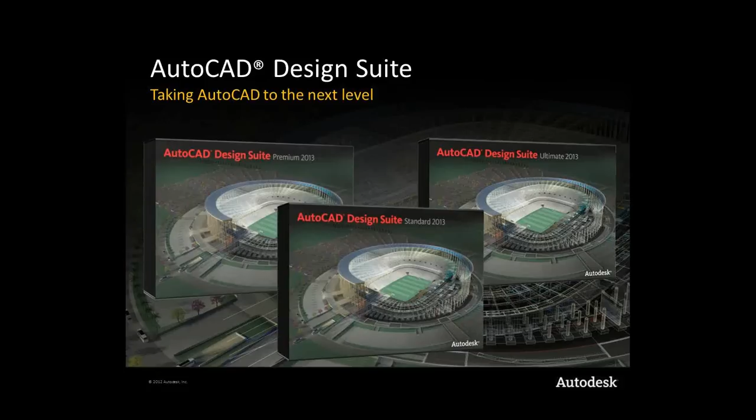So you'll be able to take everything that Lynn showed you today with all the advances that AutoCAD 2013 has, and even take it to the next level with the AutoCAD Design Suite being the best way for you to find the most value in AutoCAD.

And the Autodesk subscription, Lynn showed a little bit about Autodesk 360, but Autodesk subscription gives you more cloud-based computing capabilities. It gives you more capacity, upgrades to the latest releases, online technical support, and flexible licensing privileges. I know that we're all working in a variety of locations, and having that flexibility is absolutely important.

And the Autodesk 360, that cloud-based offering that we have, gives us the ability to get access to all of that information anywhere, whether it is what Lynn showed today from the settings standpoint, or wanting to make sure that you access your files out in the field and maybe leverage WS on a tablet. You're going to find a lot of value with Autodesk subscription and 360.